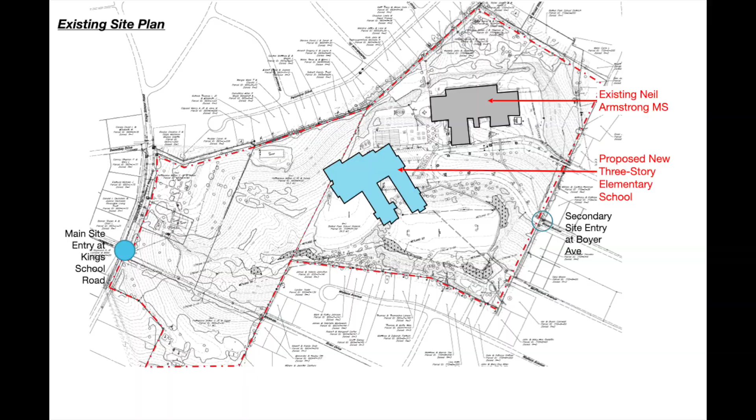So this is a conceptual site diagram of the site, with the same orientation. The new main entrance is on the left off of Kings School Road, and the two existing driveways are on the right-hand side with the existing Neil Armstrong Middle School in the upper right portion.

One of the things that, as we start to develop the site plan for this new elementary school, we want to take into consideration is the best location for the building so that it accommodates the size of the building, the distinct traffic patterns that will exist around the building - things like pedestrians, students, parents dropping off and picking up, buses dropping off and picking up, staff parking, event parking. So all of those major circulation paths are a very big part of figuring out how to site a building and develop the site. Jenny's going to explain some of that, but I want to also point out that there's a lot of other stuff that goes onto the site as well, such as play spaces and outdoor learning spaces, and also pragmatic issues like receiving and utility service areas.

So with all of those things factored in, the most logical place for the building was in the middle of the site, which nestled the new proposed building into the hillside. We are proposing a 3-story building where the building has 2 at-grade entrances. The lower level is down on the south end of the building, and this is going to be adjacent to the bus drop-off and pickup area.

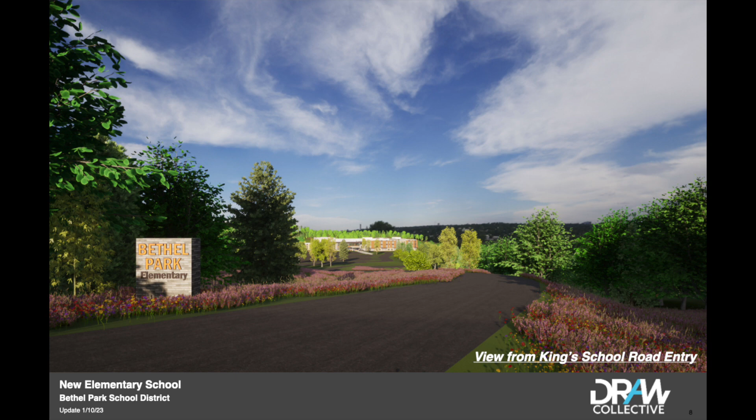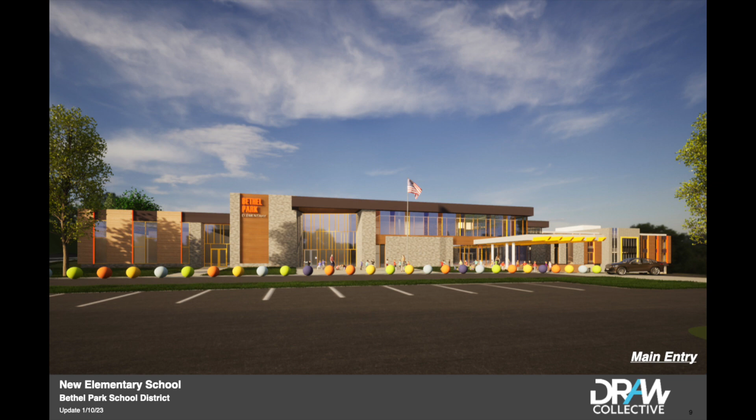A couple other conceptual renderings. This is a shot of what the vision for the front entrance is. So this would be the parent drop-off loop here, and this zone right in front of the building would be the area for drop-off. We have the main entrance over here on the side where we would have a secure vestibule. And then behind this area is a large group instruction space.

One of the reasons that it's located in this area is, one, for events. So if you are coming for an assembly during the day, this space is convenient to the entrance and is accessed through the secure vestibule. But also this space will make a nice place for aftercare or before care, right here adjacent to the entrance.

For context, to the left of the screen is the access that continued, that would be gated towards the service receiving and the one large playground. And to the right, there's terrain, and that lower other playground sits off to the right.

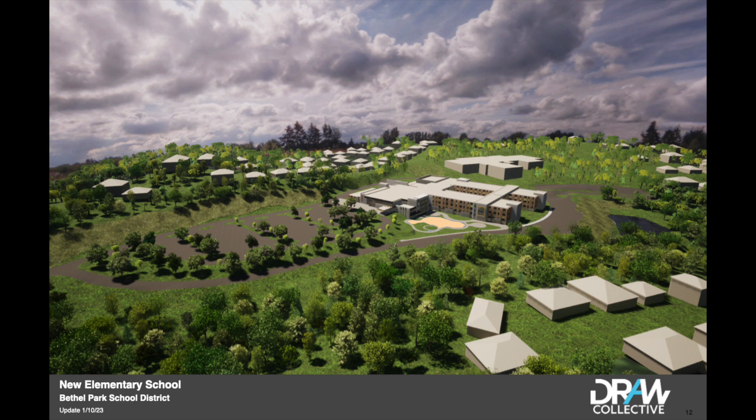This is our proposed new building sitting a little bit lower on the site. The bus drive that we talked about is this area here, kind of right below the building. And then this is the parking area in front of the main entrance, which is facing us. So you can see that there's quite a bit of topography from the neighborhood that's above the school and then the neighborhood over here to the right.

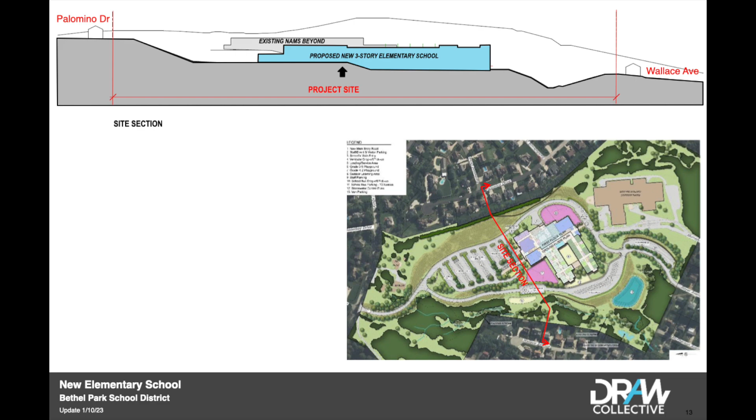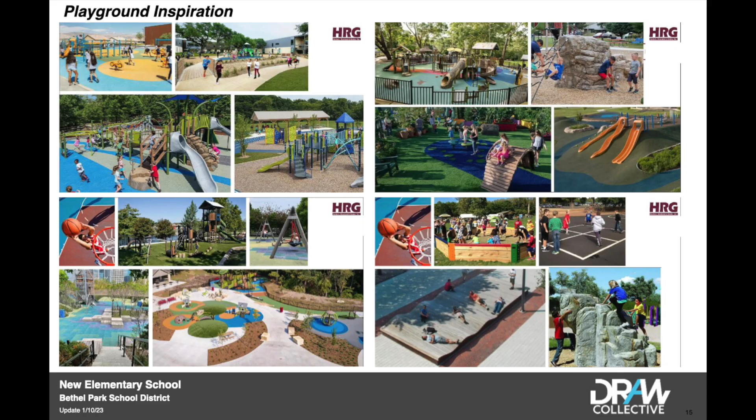I think that overarching on the site and landscaping design, it's designed to be very pedestrian friendly and responsive to the adjacent neighborhoods, but also friendly for the students. There'll be playful characteristics of the site, but also it'll be an enhancement to the campus that's here today, with a lot more appropriate vegetation, natural barriers for safety, and fun spaces for students to both play and learn.

I think Dan's going to come up and talk a little bit about the building, but are there any questions to anything that we've gone over?

Question: regarding the playground, is there going to be space for kickball or soccer - did you take into account non-playground specific activities? The question had to do with whether there were places for playing ball and running around. The short answer is yes. But for the two playgrounds, we had a lot of conversations - the district actually engaged students in the questions, and we found there were different needs for the different age groups. So one playground will probably have a little bit more of that than the other, just because of the age groups.

My question's about the slide you showed with all the landscaping - I'm a landscaper all my life. Are you going to put in irrigation for all the landscaped areas? No. We're looking at more native species and trying to accommodate low maintenance. So the slopes, we're looking to have more of a meadow condition that wouldn't need to be mowed, stuff that's going to grow easily in the area.

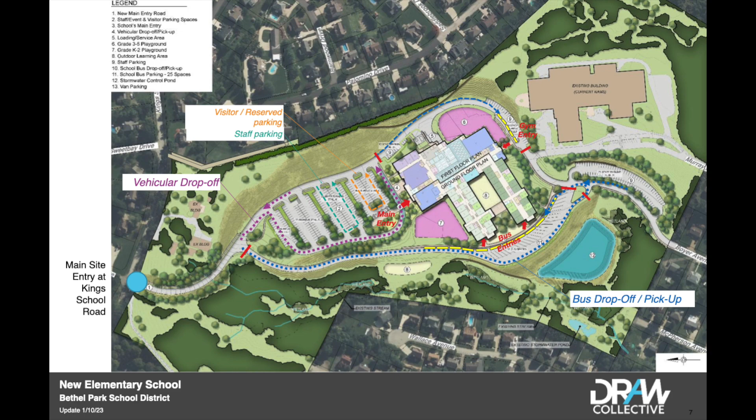I have a question: what happens to the existing school? Yeah, so are we saying mothballed is the right term? The idea is that it's not going to be used as a school. It will be used during construction, though, as well as the elementaries will be maintained during construction, and then it will be closed up.

So just as, I'm sure many people have a question around what's going to happen with all of the existing buildings. One of the next steps we're working on is assembling some committees with a lot of different kinds of representation to talk about options, put together some options. We'll present those options, but it's not something we're going to decide as the board by ourselves. We are having a broader committee from the rest of the community to help identify what's best for Bethel Park.

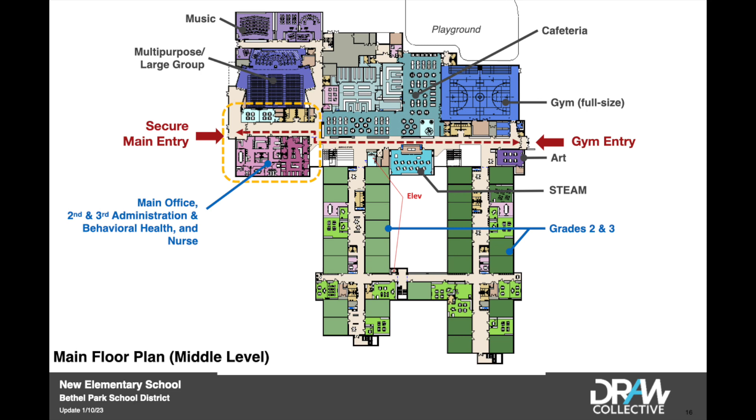In this case, we can actually design for the smaller kids, and the PE teachers have been working hard on really envisioning what that would be like.

It'd be a completely different experience, rather than just assuming that everybody goes up to the big basketball court. How does that work when the kids are only 38 inches tall? So here's a space that actually can respond to them.

Along the park path, there are a lot of STEAM-related activities. One of the things the design does is we spend a lot of time trying to find ways to allow the school to educate outside of the classroom. It can be pretty boring for kids to sit in the room all day for 6 periods, and it's a lot of work for teachers to try to get everyone excited and switch from one subject to the other. Sometimes it's good to have opportunities to go other places, and in other cases, the building can teach a little bit too and support that activity.

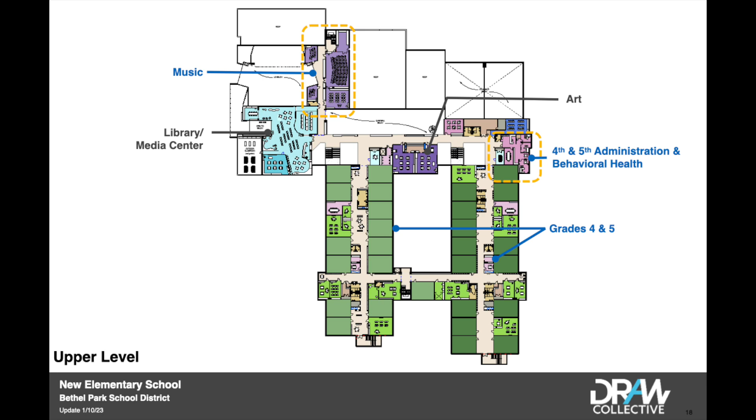This is just a little blow up when you're looking at that middle portion of the layer cake, and I mentioned the park pathway and then the public side of the building. This is a large group instruction space.

Large group instruction is not the same as an auditorium. It's a little bit like an auditorium because it's got a big high ceiling and sound controls, and it's primarily made for, at this grade level, grouping musical performances, strings, band, choral. But one of the things we do a little differently is we give it a flat floor.

So as a contrast to the space we're in today, we have fixed seating here. You really can't do too much. This is really unusable space during the day. If we wanted to do an indoor recess or something like that, this space would be used for that, but there's not a lot of space to run around and do movement. There's not a lot of flexibility.

In this design, it's a telescopic seating scenario. The seats are very similar to a typical auditorium seat that you'd be familiar with, but they actually telescope back to the wall, just like a standard bleacher would in a gym, so that allows us to have a big open floor.

The other advantage is when you come to an evening performance, let's say you're coming to watch your students play their musical instrument. One of the things we're always challenged with when it comes to the traditional auditorium is there's a stage, and everyone's up on the stage, and they fill it full of the instruments and all the students. And here we are, parents, we're down here looking up.

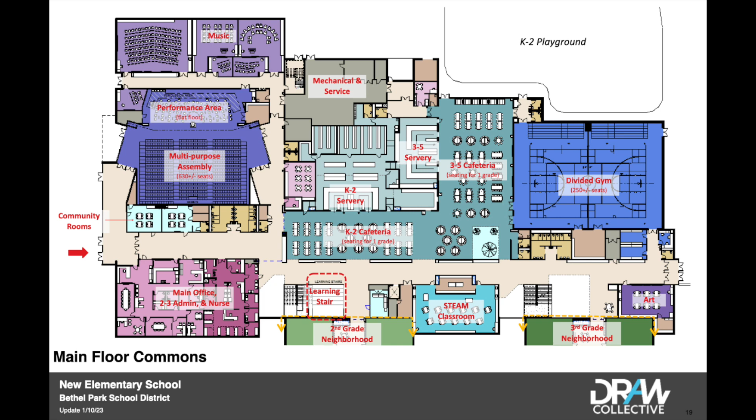From a thematic point of view, as we're talking to the staff about the kinds of educational programs they're emphasizing on a grade level basis, we ask: can the building teach? Can it have a theme that represents what's going on educationally, but also a theme unique to Bethel Park aesthetically? So we came up with a park-like theme, and this is an early sketch of that concept.

Essentially, we looked at a day in the park, 24 hours of being in the park. What is it like to visit a park? You have sunrise, sunset, maybe a starry night. And who are the users of the park? They might be campers, hikers, foragers, climbers, and so forth.

One of the things the school wants to do is emphasize each neighborhood, or each grade level, independently. You may be familiar that they get different t-shirts and different names. The school hasn't decided what those will be here, but picture first grade as the climbers with green shirts and a logo, and second grade as foragers or bird watchers with purple shirts. They represent their neighborhoods, and we try to integrate that into the design.

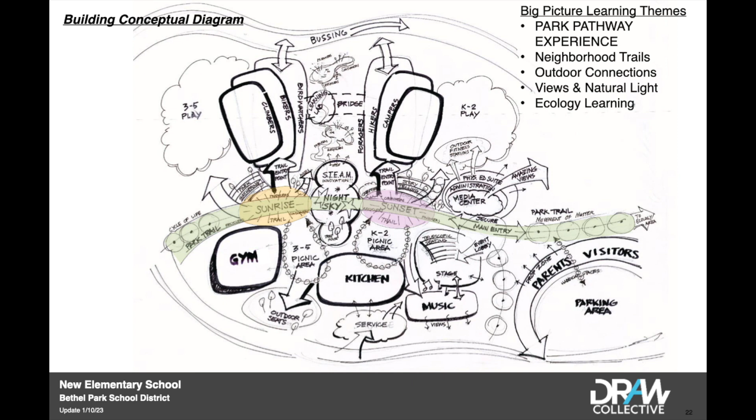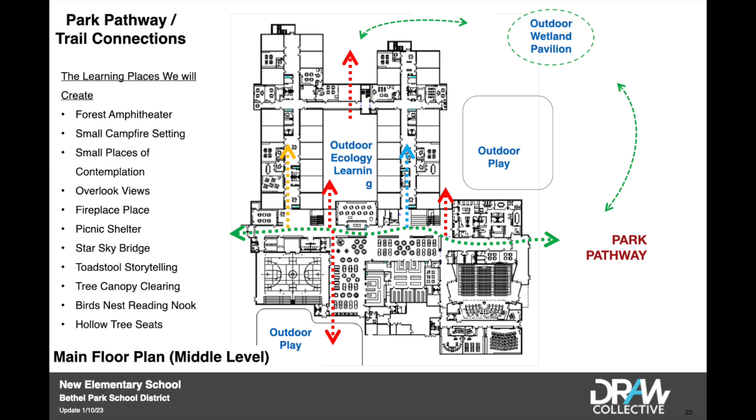So I spent a little time talking about ecology. This plan is turned around, but it represents the park path and expresses the views and accesses we have to the outdoors on a daily basis — that's what those arrows represent. We also have multiple outdoor access points, play areas, and ecology areas shown on that plan.

When you have a theme, it helps you bring color into a building. It helps determine there's a reason why things are what they are, rather than everyone sitting around with color swatches saying 'I like purple' or 'I like orange instead.' So we like to order a building if we can, and we start to look at what colors would be present and appropriate.

This is setting up colors by neighborhoods and what our format would be, also working in the colors of the district if possible — in this particular case, it certainly could be.

As part of the forest concept, and as I mentioned about light, sunrise and sunset represent themselves three-dimensionally in the building. One side of the building along the park path would have a sunrise theme, the other side a sunset theme, and in the middle, the starry night. We'll pick the colors from real life and bring them into the building.

We address light and the forest theme across all three layers of the layer cake: the lowest layer represents the forest floor, the middle layer the understory, and the upper layer the forest canopy — showing how light streams through a forest differently at lower versus higher levels. The creatures that inhabit each of those levels also get represented in the building. This gives teachers an opportunity to connect, walking around the building with the kids and making connections depending on their daily educational format.

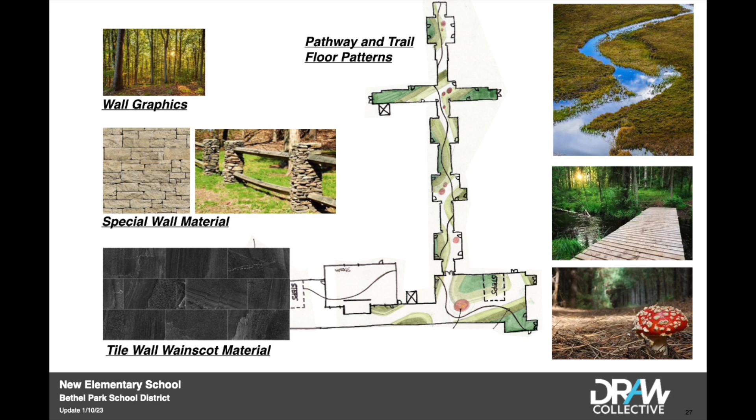Some of the things that go along with the park theme: stacked stone. We're all familiar with being in a state park, seeing stacked stone railings or signage, and maybe some footbridges. So in the floor patterns, we'll be doing a park path, with floor patterns that allow students to cross over footbridges where there might be faux water, and we'll use park themes when it comes to signage.

You have to remember, this is for kids, not for us. Us older folks go, whatever. But the reality is, our goal is that we want the kids to feel special. We want them to enjoy their environment and not feel institutionalized, and have things that are relatable to them and a little bit fun.

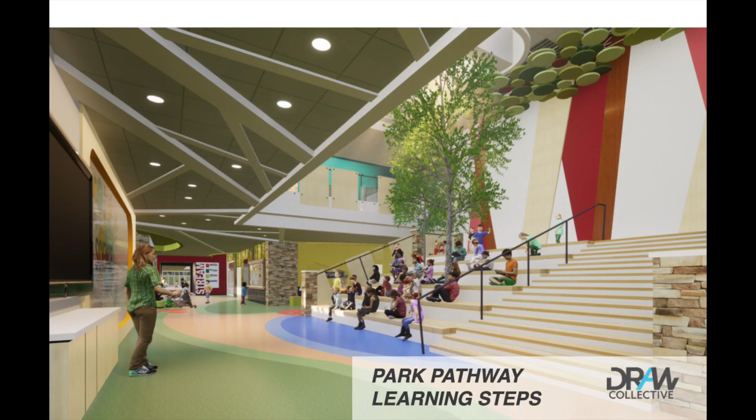And it doesn't take too much effort on our part to include those kinds of things. So our team at DRAW have worked really hard at turning a lot of what I just got done talking about and rambling about into visualness.

I mentioned a little bit about the fact that the building teaches outside of the classroom, or offers locations where you can learn outside of the classroom. This is a good example - an image of if you came out of the lobby and walked along the park path towards one of the classroom wings, just around this corner is the entrance to the second grade wing.

These are called seat steps, or learning steps. On this middle level of the layer cake, we'll have an opening in the floor that goes up to a skylight. We'll actually have trees in the space, and a faux canopy where we'll get the dappled light to come down. These are light rays just painted on the wall and done with acoustical treatment.

And you can see a little bit of the park path coming through here and some stone represented.

It's not Disneyland. The idea is that without a lecture about it, a student or an adult could walk through and say, hey, this is a nice building, this is different, this is interesting, and everyone can talk about the fact that Bethel Park is a beautiful school.

If someone walked along with you and told you what the thematic portions of the building were about, then it might click for you, and you might say, oh, I get it, I understand. So that's really the difference - it's a little bit of a subtle scenario. We have to do a lot of work to create a theme, and then it gets a little bit watered down in reality when you start to impart all those things.

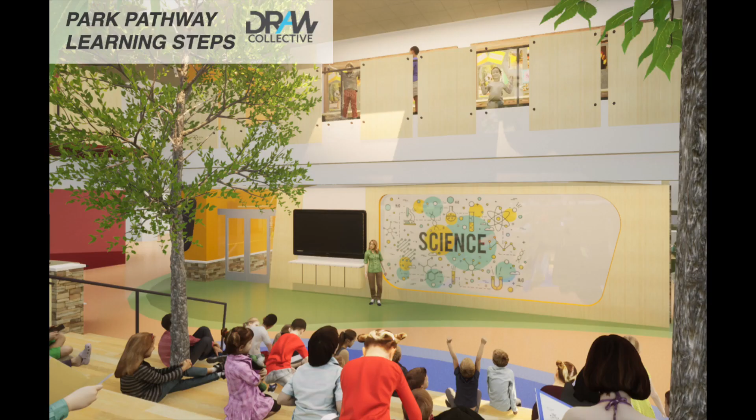This is if you were sitting on that learning stair taking a look - this is a big presentation wall, and that's the presentation area. Up above here, you can see Susie right here, looking through and looking down at what's going on.

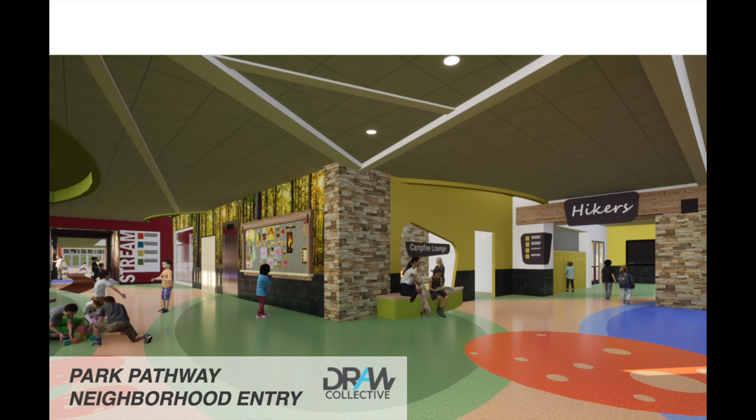This is an entrance just beyond that learning stair, just to the right here in the image. This is the entrance to the hikers neighborhood, in this particular case, second grade. We have a small group room here that's just off of that area.

Part of all of this is wayfinding too. When you have any size building - I talk to, we've been meeting with the staff and talking about the buildings they have now, that you guys have right now - kids can get lost just going around the corner to the restroom.

Our goal is to try to make things usable from that point of view. One of the reasons kids get lost so easily is everything looks the same—they walk out and that same brown carpet or the same tan walls are everywhere in the building. So we'll use color as a signifier so that as you go through, you can clearly see that one wing is a different color than another wing, and the students will be able to recognize that.

A little bit further down the hall, you'll see representations of student work being displayed. One of our number one things is to try to celebrate the individual students. They can see their work up in the classroom wings, out in the path. When public comes to see a basketball game or intramural sports night, you can walk through and see what's going on in this school. Super important and a lot of fun—there's a lot of great things going on in this district.

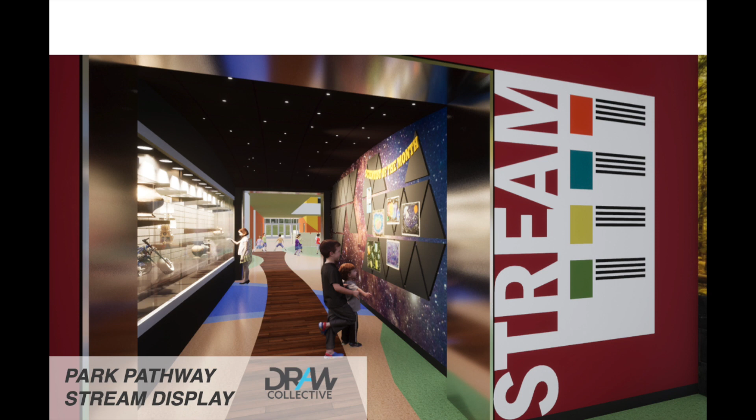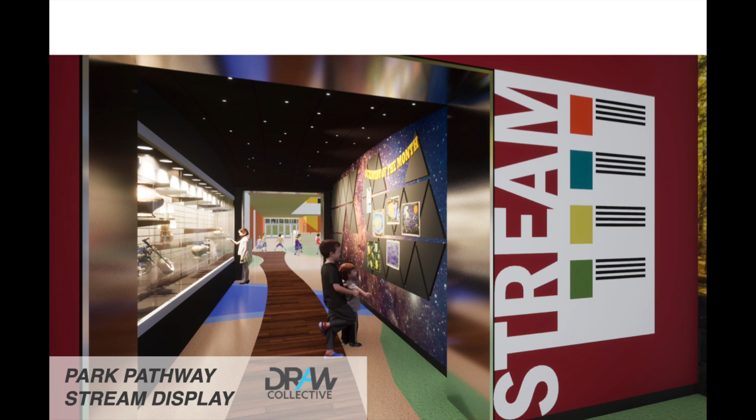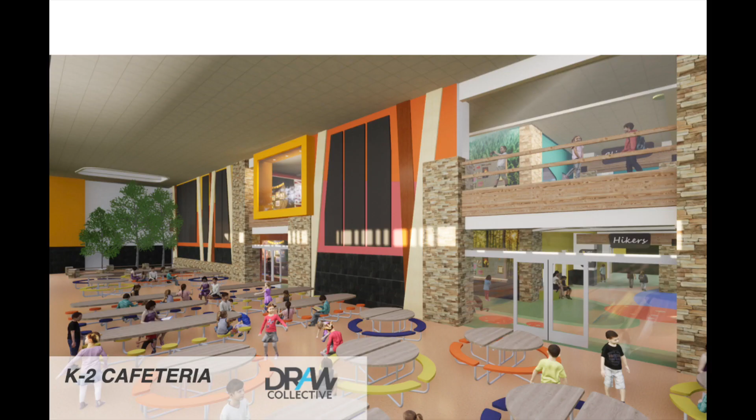This is the cafeteria—it was an early picture. You can see earth tones, trying to make a space that's warm, have some fun with color, and represent the theme in a space like that. We also have special learning spaces inside the cafeteria so it can be used outside of cafeteria time—you've got that in the middle of the day, but also a morning time and an afternoon time, and the opportunity to use the cafeteria for PTA events and other gatherings. We could be doing a meeting like this in there.

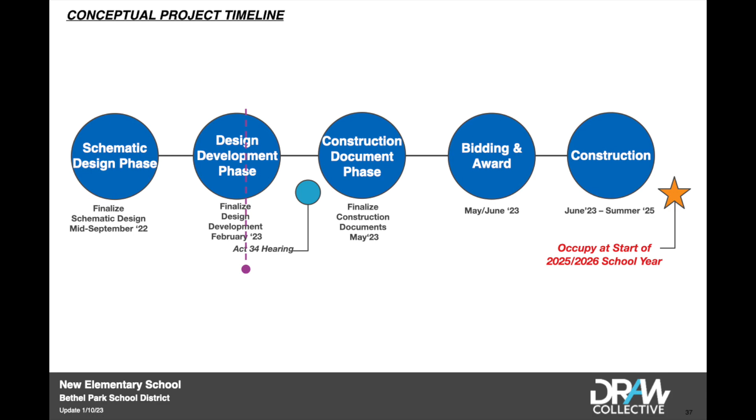That's it for that. Our last slide was basically a description of the schedule for the project. So currently, the district has undertaken a huge task, and the municipality has been working really hard along with us—you've heard a lot about traffic and approvals and things like that. No single entity, the school district, us, the engineers, or the school district's engineers, is in control of all of those things. We work really hard as a team to communicate and present all the information, follow the rules and codes, to give everyone enough time to solicit good conversation and make good decisions. We have state approvals and things like that—it just takes time. This is a very aggressive schedule from an approval point of view, trying to make sure we get as many ducks in a row as possible and get all those things accomplished.

So the district is working towards completing this documentation phase of the design and all of the approvals by the end of the spring, and then trying to start construction in the summer. It's a two-year construction process, give or take a month, but the goal is two years from next August to be open.

Questions? Just on the square footage of the classrooms now compared to the buildings they're currently in. The typical classroom is about 843 square feet, which is significantly larger than some and slightly smaller than others. I don't know which buildings off the top of my head, but we've been in all of them, and it's a good size. The kindergarten rooms are larger, though I don't remember the exact number.

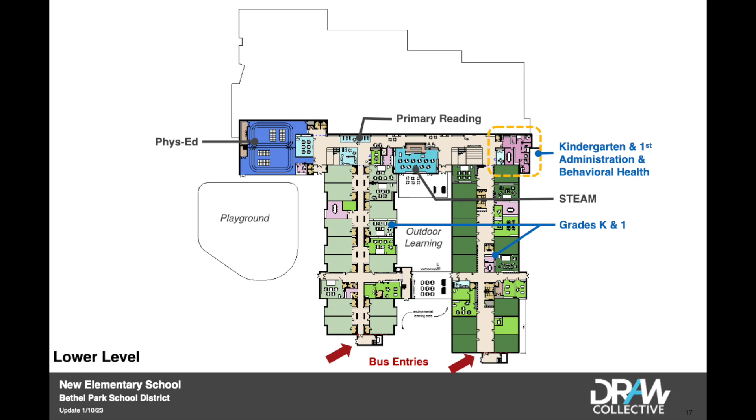Any other questions? I had two questions—my second is, I know you said you weren't going to talk a lot about security, but I've seen red arrows showing entries in addition to the main entrance vestibule where you said there'd be security measures. What about the gym entry, the bus entries—will there be security measures at those access points as well as the individual classrooms?

Yes. So first of all, security and safety, I put them together. We have to have enough exits out of the building to be safe and follow fire code—that's a natural requirement in any building, so any big school has multiple exits. The reality is, though, one of the things we do is what's called the systems thinking format.

Every door on the outside of the building has a plan for that door. They are all electronically controlled. So as an example, if you come out onto the playground, on the kindergarten and first grade playground, that door access point is electronically controlled. Teachers will have a badge to allow them to go in and out, but unless you have that badge, you can't get in. You can always get out. All the doors are controlled that way.